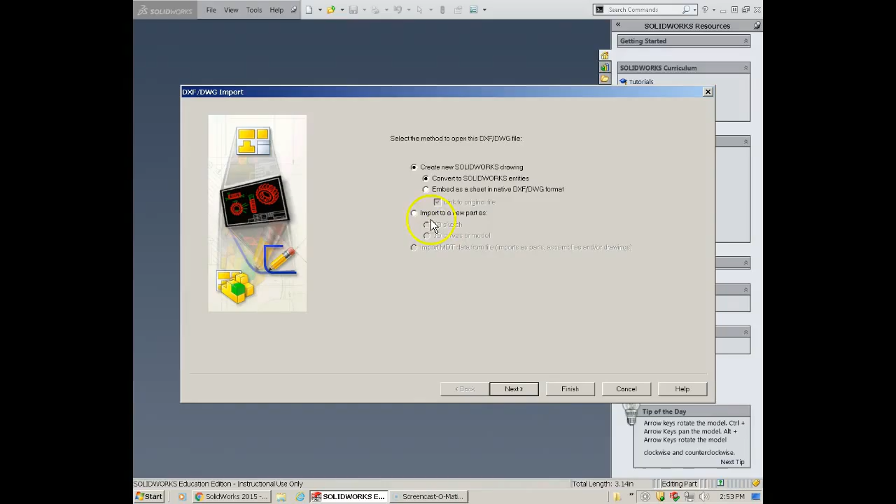We're going to import it as a 2D sketch. We want to make sure that we have a white background selected, and we're going to add constraints. Hit next, make sure we merge closer than 1,000th, and we're going to hit finish.

Okay, so you'll notice that this has launched a new toolbar over here, and this is our 2D to 3D toolbar that has popped up. We're now going to take each of these sketches, convert them to their own sketches, and put them on the appropriate planes.

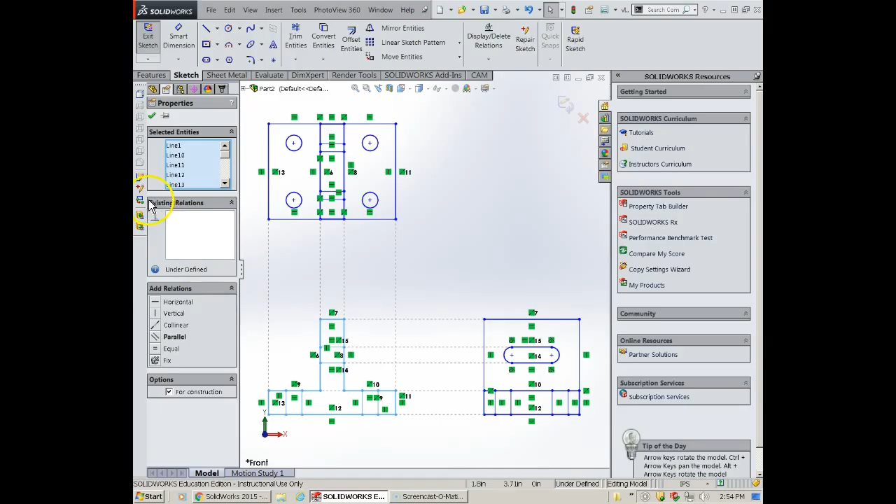So first we're just going to do a drag select over what is the front view, and we're going to come over and select the front view option, and you'll notice that it grays out.

I'm going to do the same thing with the top. Come over here and select the top, making sure we're selecting the right boxes over here. And we're going to come over here and do the same thing with the right view.

Okay, now if you look at this in its isometric orientation, you can see that these views have been put on the various planes. So the next thing we need to do is actually line these up.

So if you're following along in the book, we're on page 18-19.

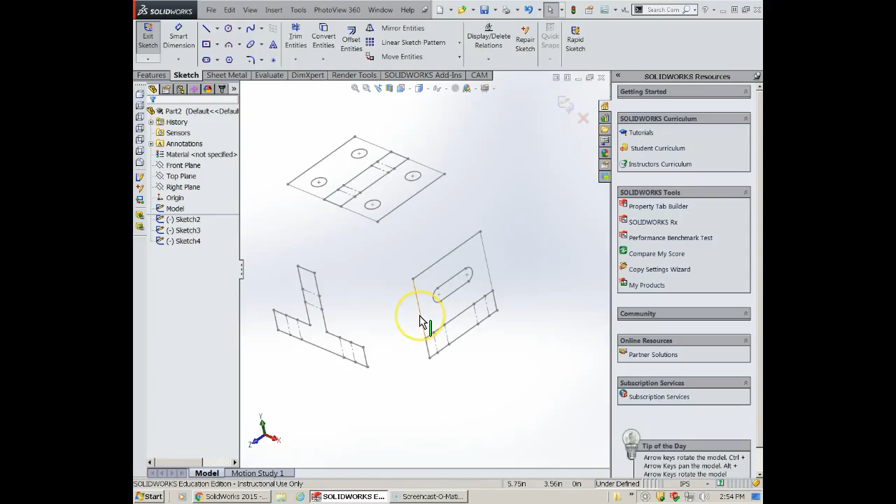So if we come in here and hold the control button down and select this line and this line, we're going to come over to this tool where we align these two sketches.

We're going to do the same thing with the bottom edge here. Again, I'm going to hold the control key and select align sketch.

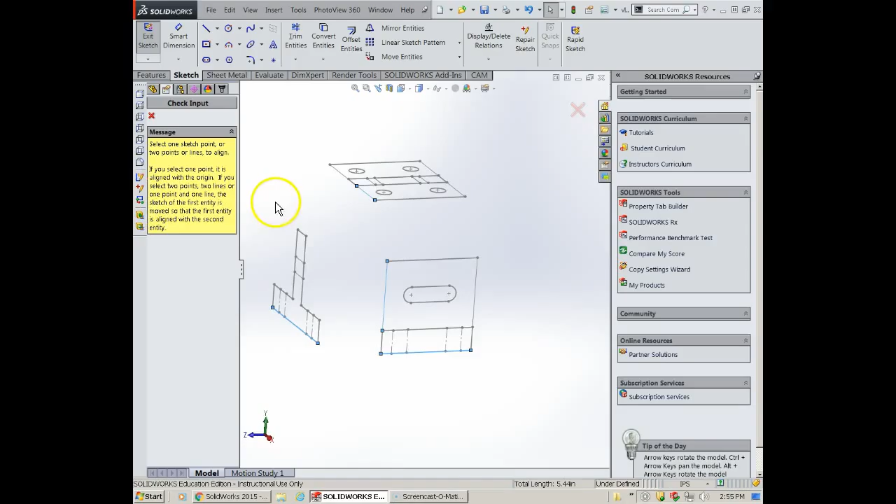Okay, that's okay. Alright, let's take a look and see. I think we're set to go.

Next we're going to come and begin the extrusion process here. So we're going to right click here and select the whole chain.

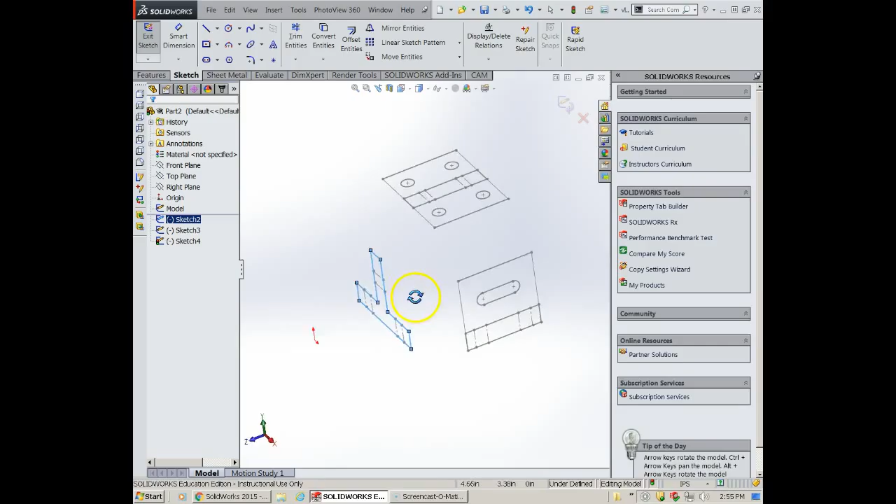And we're going to come over here to extrude, and we're going to select from vertex, select this vertex, then up to vertex, and select this vertex, and that part's done.

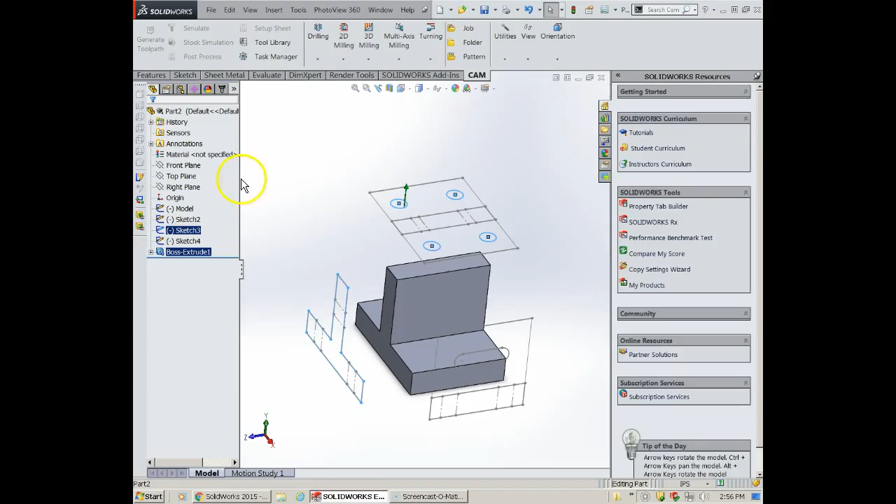Now we're going to come in and select our circles, again holding the control key down. We're going to come over this time to an extruded cut. It's going to go through all. That takes care of those holes.

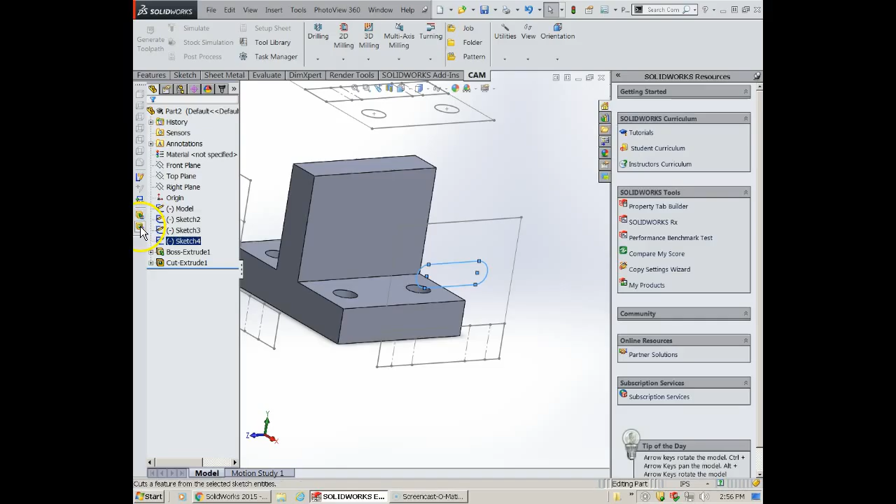And then over here I'm going to right click and select chain, go to extruded cut, through all, and it's that simple. So I think I've just taken us to...

Page 18-24. So that takes care of that. The last thing to do is to hide these lines.

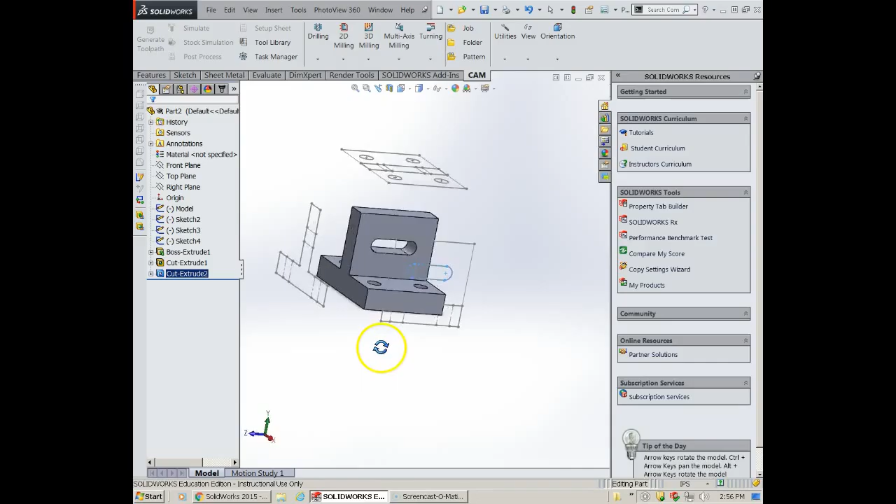The easiest way to do it is probably to go here and hit hide. So I would come to each of these sketches and just hide them that way, so we can take a look at our part. And that takes care of that.

So we're going to do a save as, and this is going to be last name, first initial. We are on to chapter 18, but this is 2D to 3D. Oops. All right.